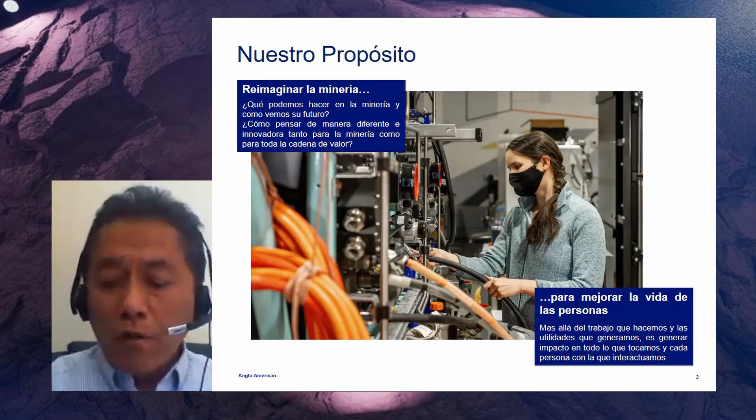To improve the life of people goes beyond the work we do and the profit we gain as a company, to impact everything we touch and every person we interact with, in the role each one has within the company or around communities.

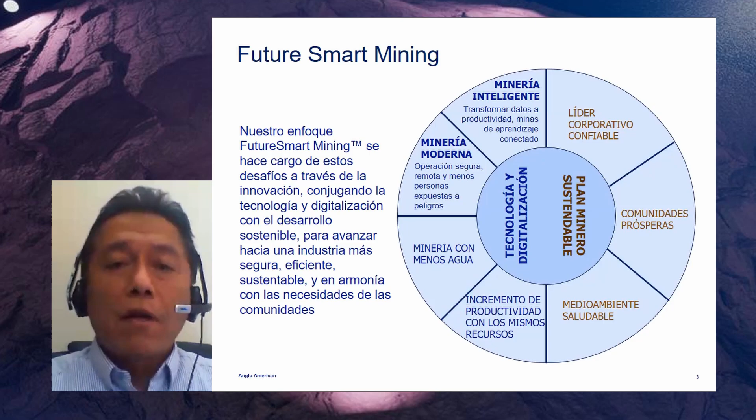Anglo has a model they call FutureSmart Mining, which combines technology and innovation looking for a sustainable mining plan. We will talk about two pillars of this model: smart mining, to transform data into productivity with a connected, learning mine through all the processes, and modern mining, which is a safe, remote operation with less exposure of people to danger.

How have we designed this roadmap to the digital mine? What we look for is to transform a traditional mine into a digital mine using technology, multidisciplinary integrated teams, and the automation of different functions and processes.

Many months ago, when all of this began, we started selecting technology for each one of the processes, in both the mine and the plant.

How do we implement an action plan after selecting technology? After the plan, we develop all the engineering for this digital implementation, which includes equipment, networks, and systems, and we also worked on automatic processes, how they can be seen, monitored and controlled, and we also designed an integrated operations room.

Beyond the technology part, all the systems and subsystems, we also address integrated processes to create synergy between different areas. And after that, what do we look for?

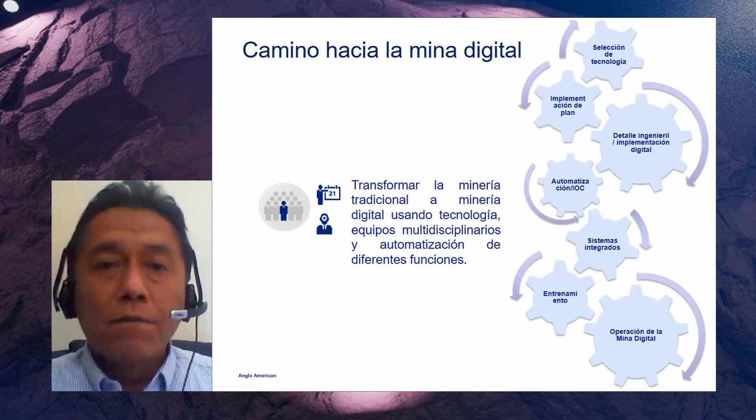This has also been very important so that all of us can be aligned in the way of working, because for Quellaveco we need to have a digital mine. Later on in the mine we've already started, but we will achieve our own operation of the full digital mine in the mine, plant, and other areas.

When we talk about reimagining mining and the different disciplines, we also talk about geology, the pit where we have the concentrations, and how the mining plan will be designed. We know we have yearly plans, 12-week plans, and monthly plans. We also see the operational part of the mining equipment.

Later on, we have the processing part of the plant, which is being built right now. In parallel, and also transversally, we see the use of assets, the asset management, where we monitor the conditions of the critical variables of each asset to give sustainability to the whole production process. Finally, to close this value chain, we have the marketing part, in charge of planning and moving the concentrates that we will produce.

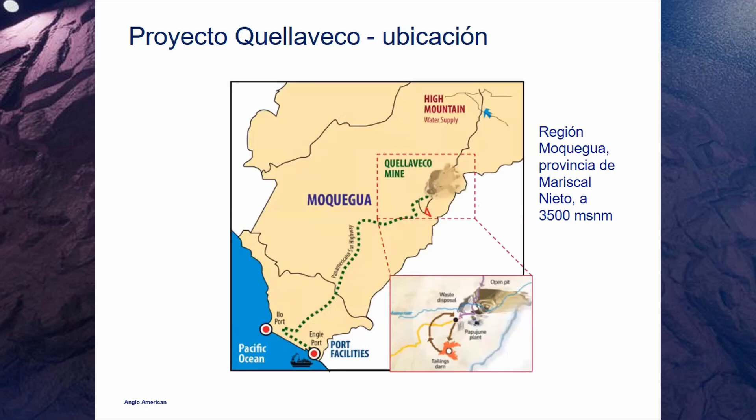Looking into the Quellaveco project, it is being developed in the Moquegua region in Peru. It has four main areas: water supply, in the high mountains around 4,000 meters above sea level; the mine, around 3,500 meters above sea level; the concentrator plant, also around 3,000-something meters; and the port area where we will export our concentrate.

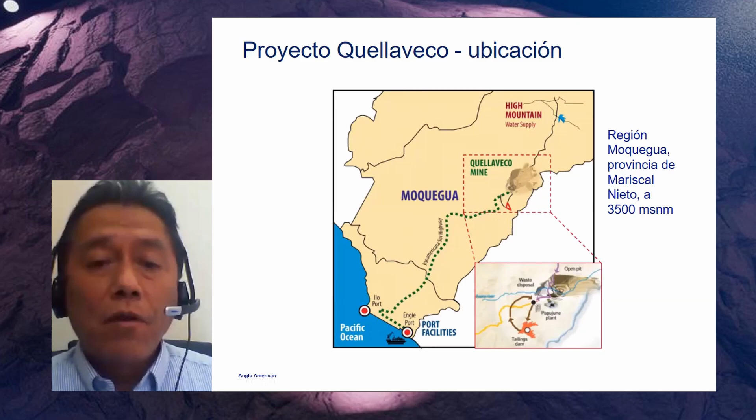When we talk about a truck, apart from all the signals from GPS, lights, and the radar control system, something very important is that it's not just that we add all these components and immediately it becomes an autonomous truck. It has a lot of sensors within the truck itself and also has an independent controller.

For instance, in the direction cylinder, we have sensors that let us know the physical position of the equipment, which lets us know through the controller, as feedback, that any command I make is being executed in the autonomous equipment.

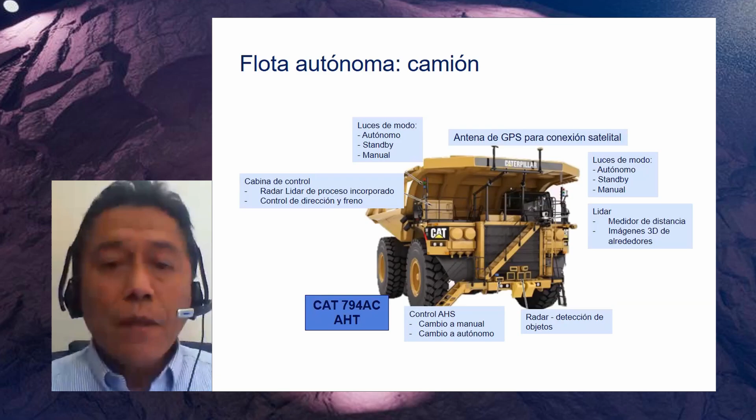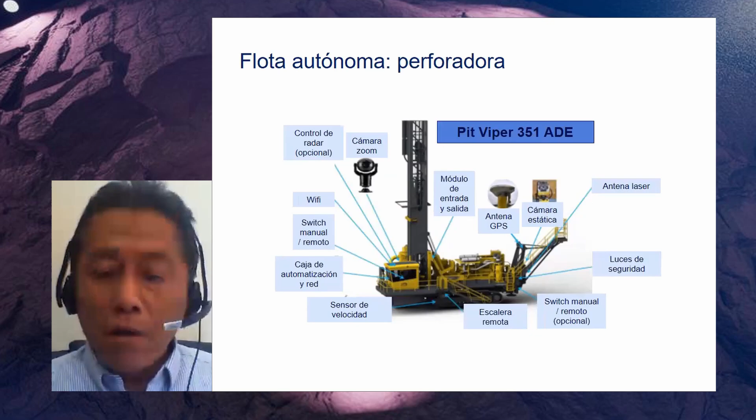So we have the truck, and we also have the drill. All the drills, in addition to the GPS systems, have many cameras around the equipment. These also let us see and control with additional tools or instruments, with a controller that works as the brain for the autonomous drill.

Additional to all of this, we have the asset health monitoring. In the case of shovels, some PLCs. In other equipment, we have some transceivers or controllers. In the case of drills, we have some controllers that are called CCIs. And this will let us have information for monitoring the health of the equipment.

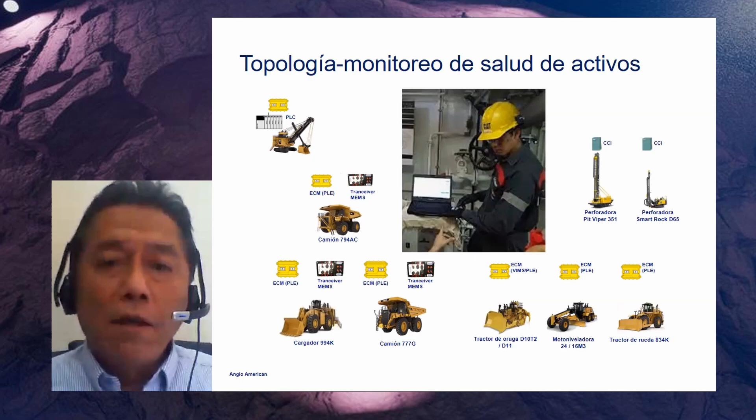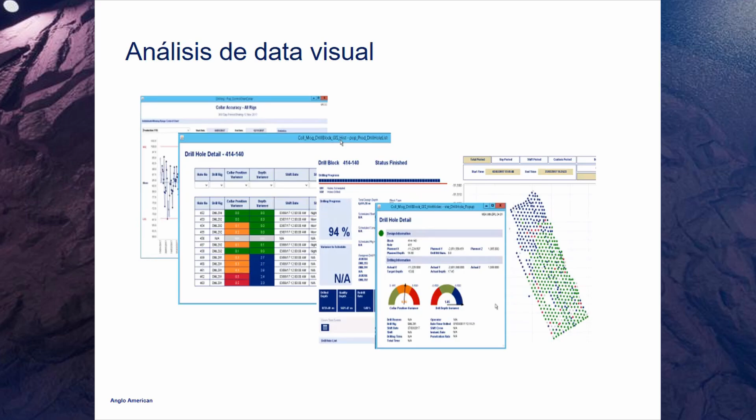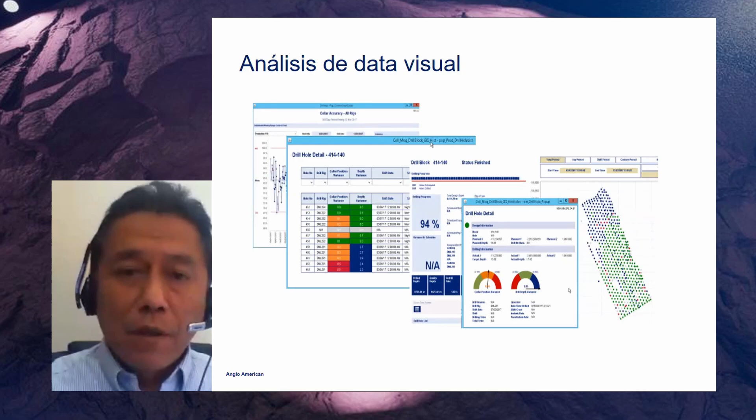Online, and this is added to all the information of the operation itself that we already have within the pit. That means that I will have data not only on the mine characteristics, but also on how the operation is going, how the performance of the equipment is doing, and the health signs of each one of the equipment. This will let me make decisions ahead of time, in a predictive and prescriptive manner too.

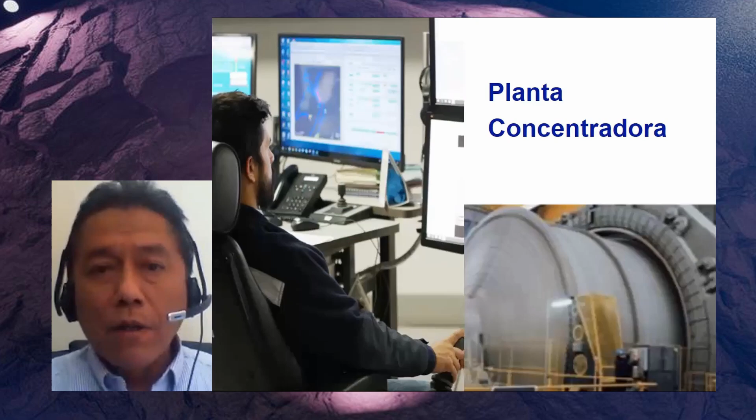Now we will talk about the concentrator plant, or what will be the concentrator plant, because it's still being built. At the beginning of the whole project, we decided to have a digital twin platform for the concentrator plant.

The platform that helped us attain this purpose was the Comos system from Siemens. These Comos systems have allowed us to work from early stages of the engineering on everything that has to do with the plant. Here we can see the P&ID.

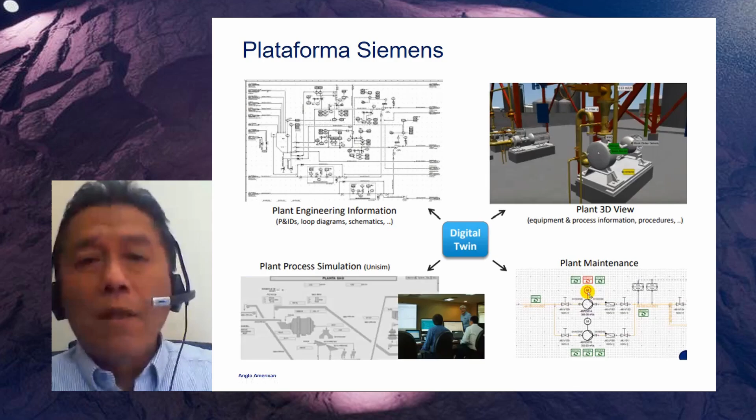It's also allowed us to see all the 3D simulations, and also in the operation itself, it will let us run simulations under offline or even online mode, using also some other tools that in the end will let us perform the maintenance of each one of the equipment that belong to this concentrator plant. So this platform, Comos, has allowed us to work from the engineering stage to the operation stage.

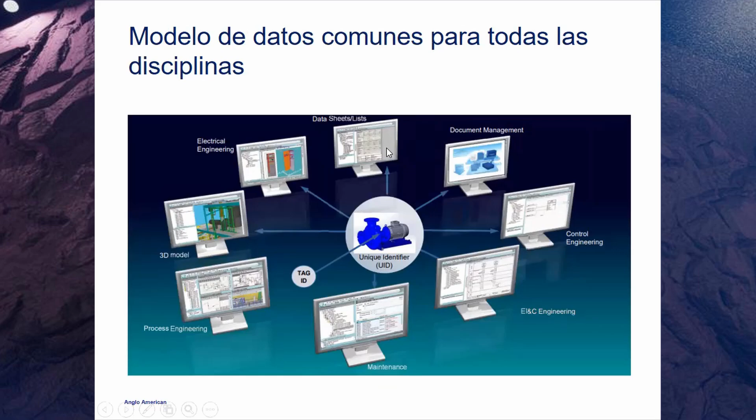As you can see here, this Comos platform has let us, since the beginning of the detailed engineering, use modules of electrical engineering, the equipment data sheets, the 3D model of the whole process of the plant itself, all the process engineering of the grinding, milling, crushing, and the document management, which is key because each equipment has a whole range of information of manuals, operation manuals, maintenance manuals.

The purchase orders, information that belongs to the supplier, and everything is managed under this document management. The control engineering, how we do the control links within the PLCs, the engineering that's part of the electrical instrumentation, and also lastly the maintenance part.

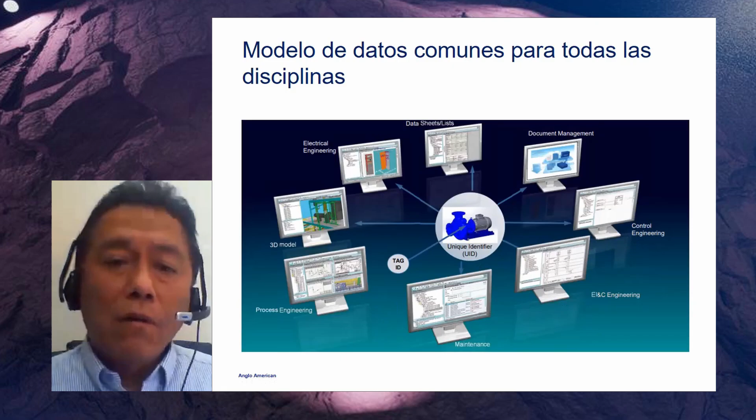And something that's very important on this Comos platform is that it works under one unique identifier for each equipment, and that is moved all over the modules that make this platform.

This motor that we have here lets us work from the 3D model, the P&IDs, as we said, the electrical diagrams. In this case, it's a unifilar diagram. We also have the function charts that are necessary for the configuration of the PLCs.

We also have the mechanical component representation. This lets me very quickly design the cabinets for the interfaces on site, and lately we will be able to configure everything within the PCS7 platform, which is also part of Siemens.

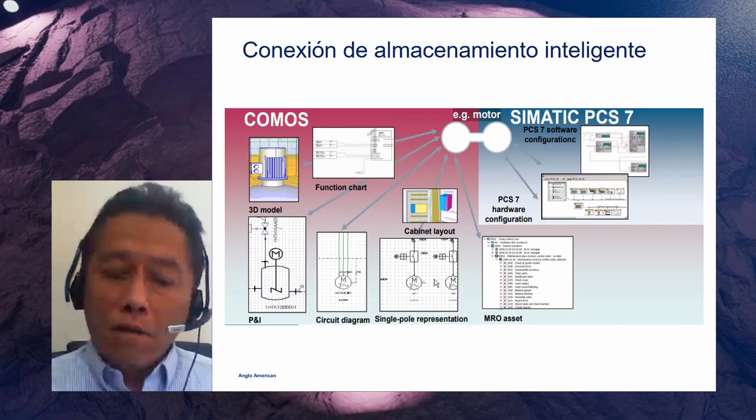In this system, I can immediately interact with all the information of each one of the equipment. The operational manuals, the diagrams, electrical or instrumental, so that the technician on site can have greater information and can make a better decision when performing the maintenance activities.

All the data that we can collect will also require some management of historical data, which is also included in this platform. We will have the collection and storage of all the data, the monitoring and notifying of the health of each one of the assets.

We are including an online platform of the critical equipment. We've identified 41 critical equipment in all the processes where we will have online monitoring. We will also have the process analysis report, an integrated business report, and mobile notifications, which can be sent to a cell phone or a tablet.

Also, all the 3D model will be connected to this system of the history of data. We don't show diagrams here because this is being developed now.

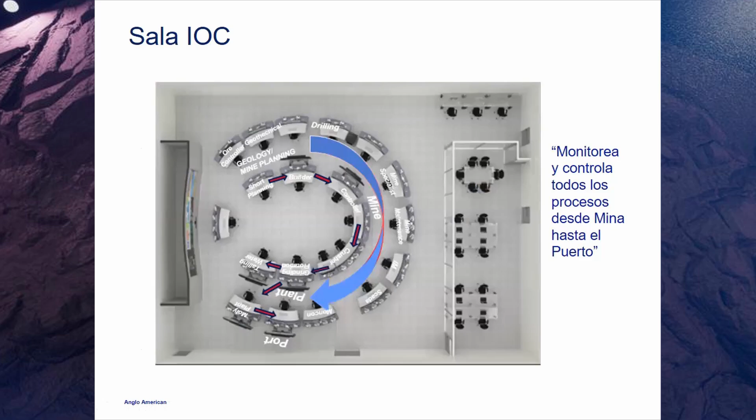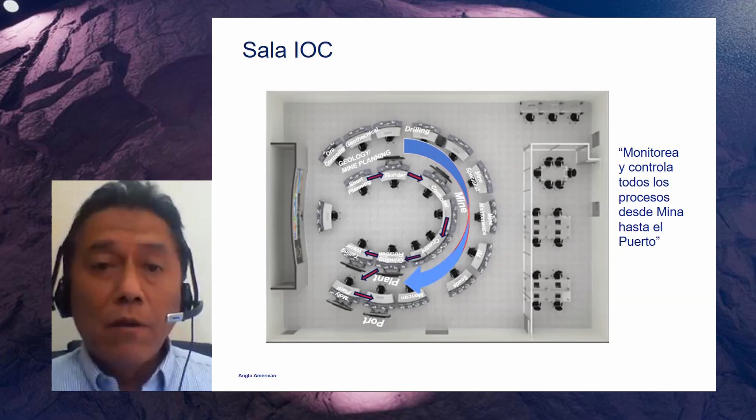And as I said before, we will also have an integrated operations room where all the involved areas, from geology, planning, mine planning, the operation of the mine itself with an autonomous monitoring system, the process area, the port area, and the asset management part, will be integrated in a single operations room. And this is from the beginning of the operation, which is planned for 2022.

Some conclusions that we can have here in the implementation of this digital mine is that we capture the opportunity of using mature and tested technology to support the business and all the operational processes: high mountains, mine, plant, and port. We enable the collaborators to evolve in their way of thinking and working from an integrated and digital mine.

This is something that we are working on from the beginning. And as I said, it's not only technology, it's not only innovation, it's thinking in a different way in each one of the roles that they have. And finally, the main goal is looking for excellence in efficiency, effectiveness, and operational security or safety. We are sure that we will get good management indicators, and that's what we are working for.

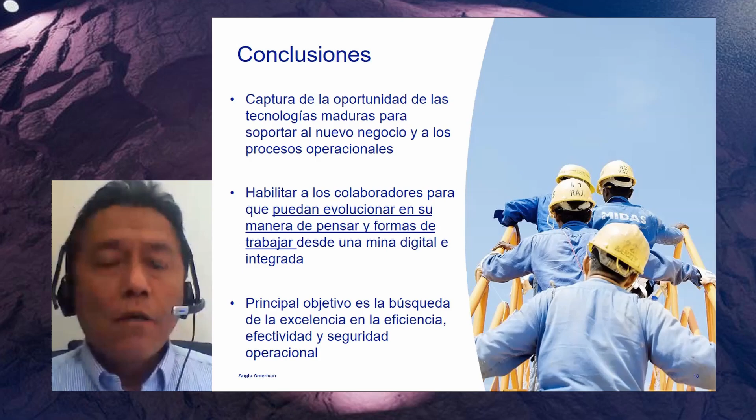I want to finish my presentation just with a message that I really like: you don't wait for the future, you have to conquer it, by Mark Vidal.